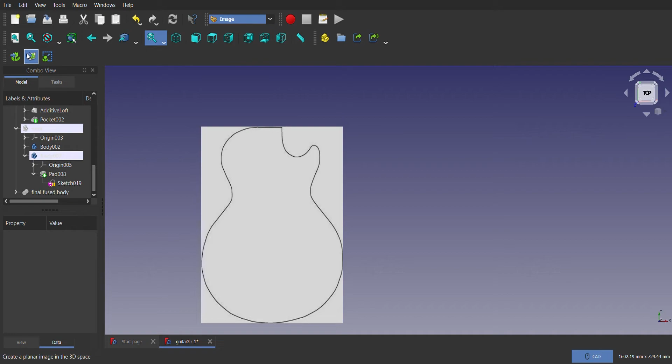Firstly, I imported an image of the outline of the guitar body from the image workbench in the XY plane using this tool. Then in the part design workbench, I created a part and a body and then sketched using the B-spline tool to trace the outline of the body.

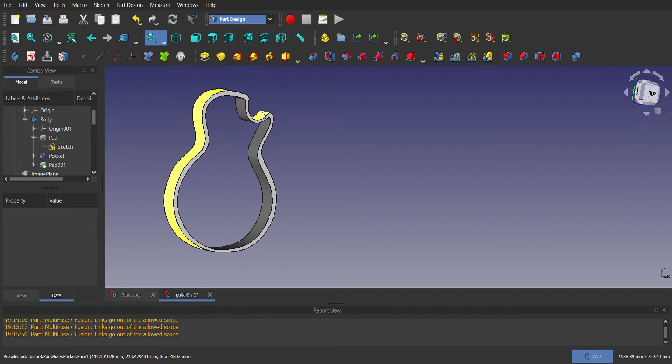Then I padded the sketch up to a length of 70 mm. To create a thick side wall like this, I retraced my sketch, but this time leaving some thickness from the outline. Then I used the pocket tool with thickness greater than 70 mm.

Now I have reused my earlier sketch and pad tool to create the back of the guitar and did the same to the front. Now on the front surface, I created another sketch of a circle for the sound hole of the guitar.

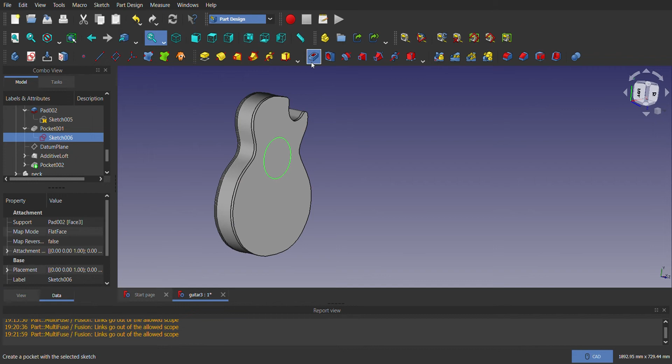Again, I used the pocket tool to create the hole in the front body, and this time the thickness is greater than the padding of the front surface.

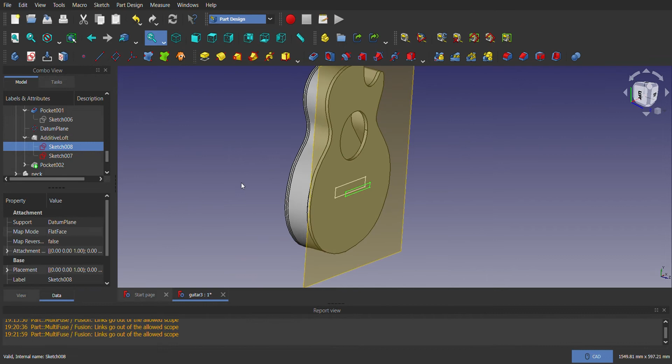For the bridge of the guitar, on the front surface, I created a sketch of a rectangle. Now I created a datum plane about 30 mm above the front surface and sketched another rectangle, this time a bit smaller than the previous one, on this datum plane. I used the loft tool to create the bridge. Let me hide those sketches.

On the top surface of the bridge, I sketched the string holes and now used the pocket tool to create the holes. Now the lower body of the guitar is completed.

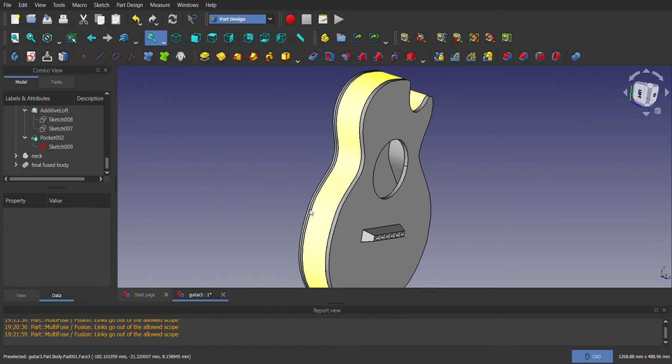Let's move on to the next section, which is the neck of the guitar. For the neck or the fretboard, I created a new part and this sketch is a rectangle, and I padded it with a thickness of 10 mm.

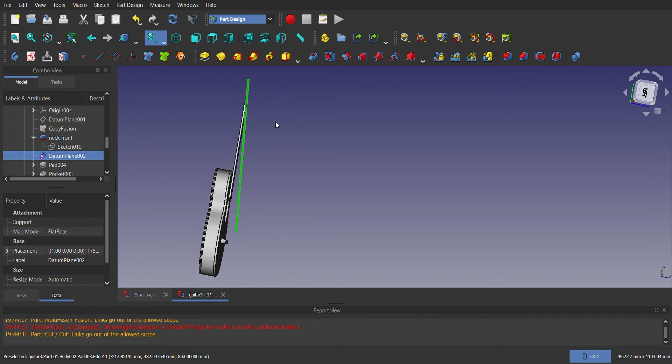For the headstock, I created a datum plane inclined at an angle of about 5 to 6 degrees with the fretboard, and on that plane I sketched the headstock and padded it.

Then on the headstock surface, I sketched circles and created pockets for the guitar tuning pegs to be installed there.

Then on the back side of the fretboard, I created a rectangle and revolved it around its vertical axis to give a round back to the fretboard.

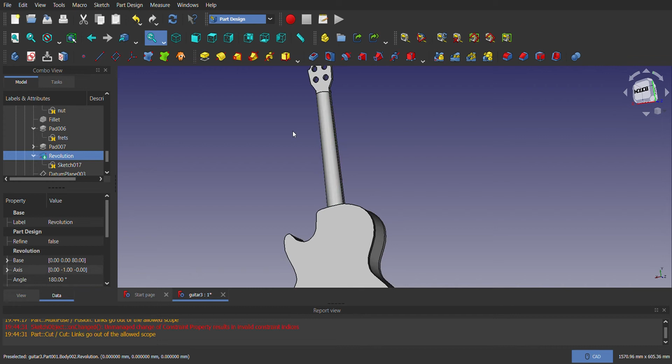Now I made this sketch again on a datum plane perpendicular to the fretboard but at the very edge of it. Then I padded it with a thickness equal to the fret and then used a Boolean operation to give a cut like this here.

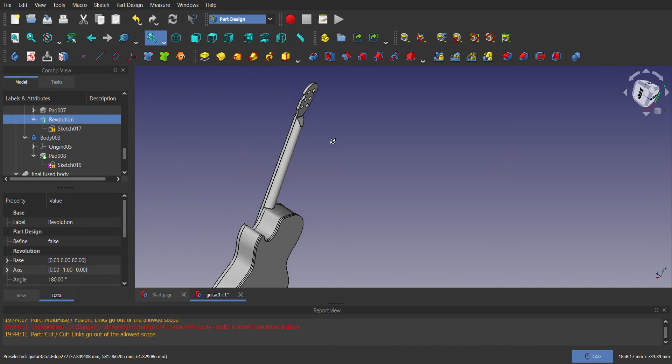On the fretboard, I drew multiple rectangles and circles and then padded them with some thickness to make the frets and the markers. Finally, I colored different parts using the part workbench by selecting every surface I need to color.

Using this tool here to make it look from this to this. Now before exporting, I used the union Boolean operation to fuse all the parts together and make a final fused body.

Now it's time to export it to Cura for 3D printing. Now we are in the Cura software. As I made this using the standard size of a guitar, in order to 3D print it, I have to scale it down so that it fits in the printer.

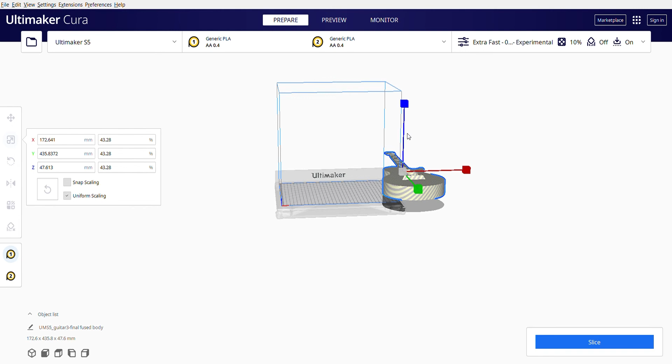So I will just scale it down and rotate it to lay flat on the surface.

I will use the extra fast profile, leaving all other settings to default, and slice it. It's showing me 5 hours and 26 minutes. We can indeed reduce this time by decreasing the infill in the settings.